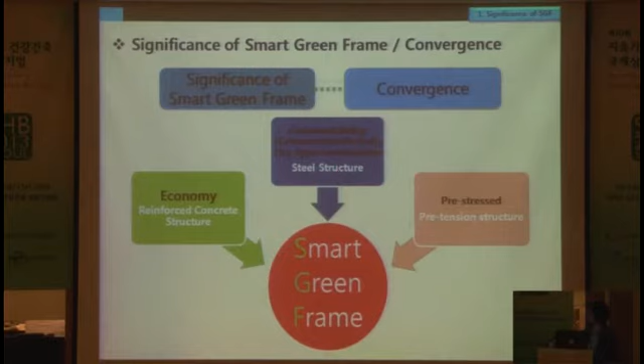Smart green frame was developed to achieve the same degree of economy from concrete structure and constructability from steel structure, with and without pre-stressed technologies.

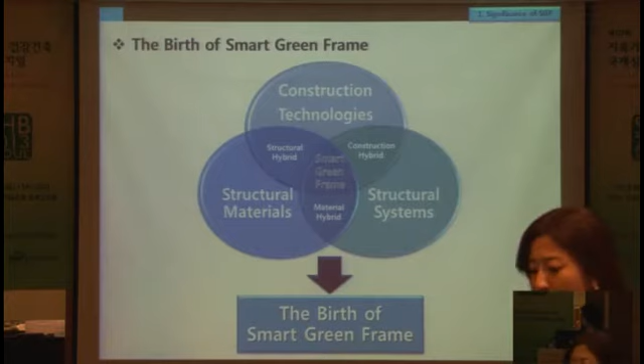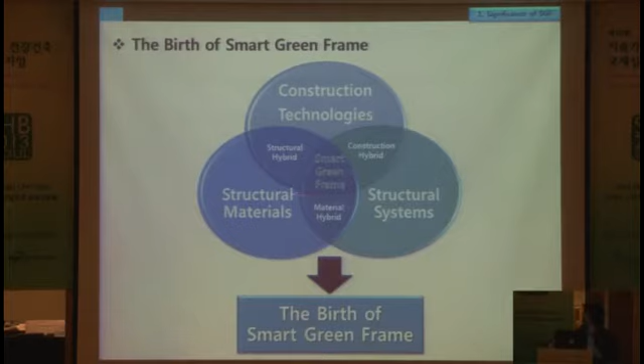These goals can be achieved based on the convergence of three fields: structural materials, structural systems, and construction technologies. As a consequence of these convergences, we have structural hybrid, material hybrid, and construction hybrid. This is what the smart frame is targeting for.

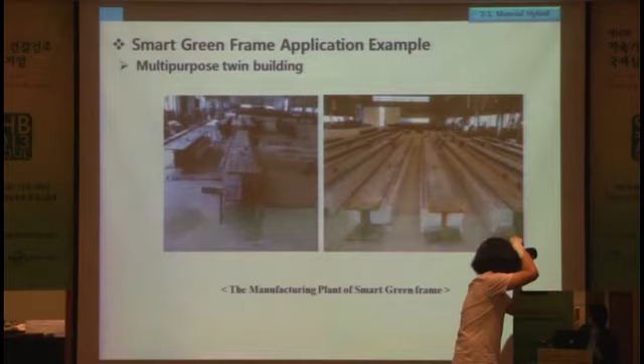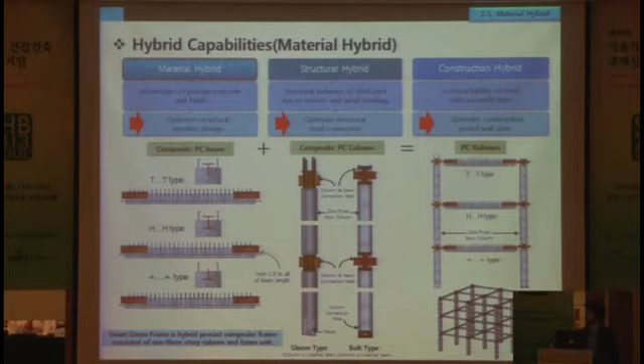The first one, material hybrid, is a consequence of convergence of structural materials and structural systems. In that material hybrid, the precast concrete is encasing a web and the lower part of the flange of steel sections, so that the slab will be installed not on the top of the upper flanges, but on the top of the precast edges. With that capability, we could have reduced beam depths and also additional contributions of concrete to the flexural load bearing capacity.

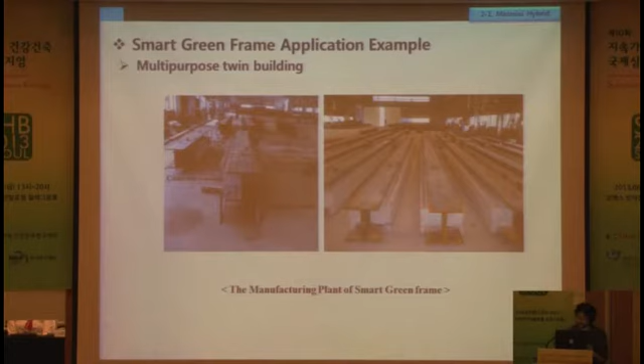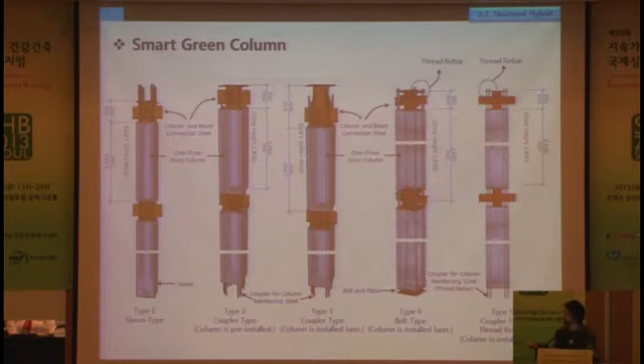Now the second hybrid system is structural hybrid, where instead of a steel beam, we have precast concrete beams, where the steel section is inserted between upper and lower precast concrete. That precast concrete constitutes the major part of structural materials, while the steel structure is a minor part - about 20 to 25 kilogram force per square meter, about 1/10 of reinforcing steel structural quantity. Those small steel sections are connected to the steels located on both edges of the precast columns, and this will serve as connections at joints and will govern the behavior of the total overall lateral behavior.

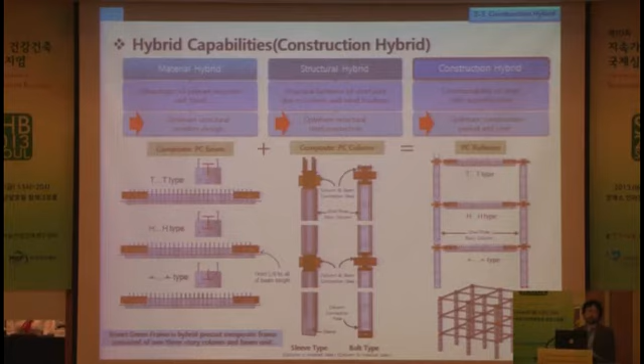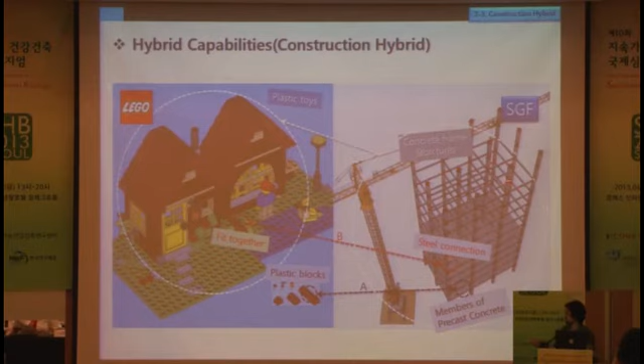These are column-beam units again. Standardized steel connections will be used to assemble precast concrete frames, just like Lego has its own routine way of putting blocks together. No matter how complicated it is outside, it doesn't really matter - we have one way of putting that together, which is very easy. No matter how complicated the outside of the structure is, we have one standardized steel connection method, so everybody can follow the procedures.

This is the schematic view. We have the advantages of steel structures and concrete, which will yield the smart green frame - concrete constitutes the major construction material, with steel erections because of the standardized steel connections.

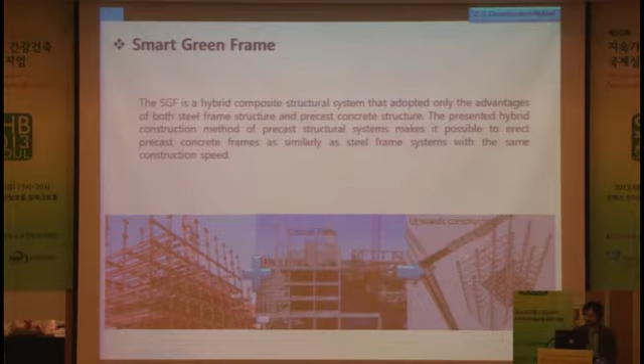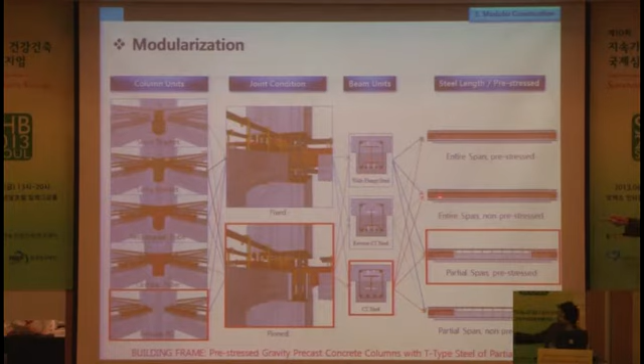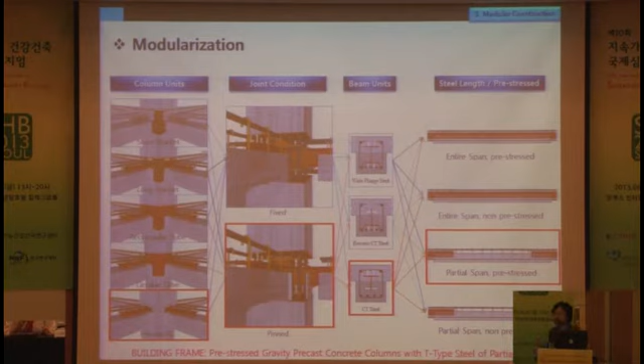This is the modular table. We have five types of column, three types of beams, and two types of joint conditions. We have four types of beam steel, whether they run on partial lengths or through the entire span of the beams. So we have almost 120 types of modular combinations provided to meet the specific needs of engineers and contractors based on construction schedule, construction budgets, external loadings, or whatever.

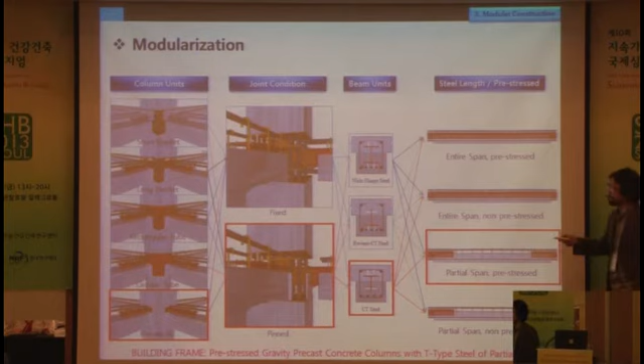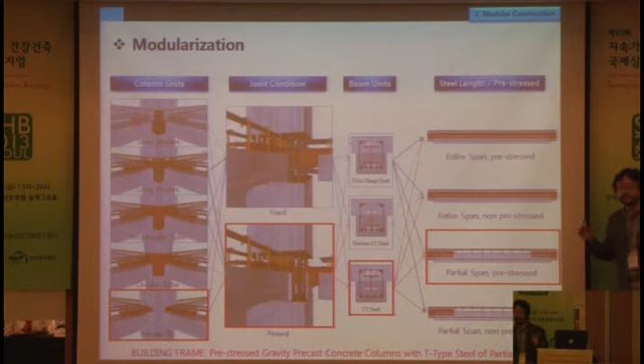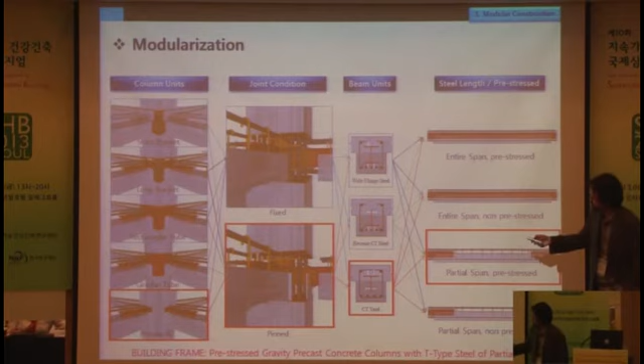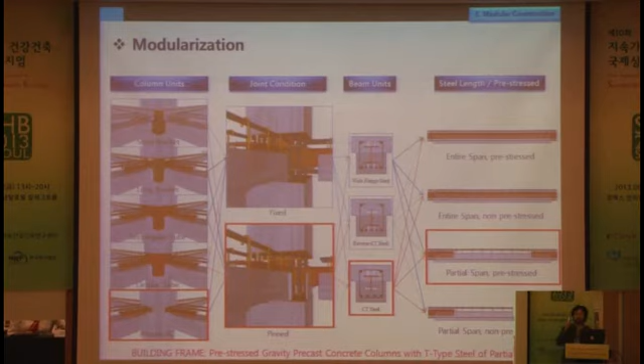But the best module, whatever it is, can really be determined from consideration of design requirements, including building heights, beam span lengths, and building types, to offer the efficient construction method of innovation. Also, the standardized steel connection is a good point - whatever modular combination you choose, you have only one steel connection needed.

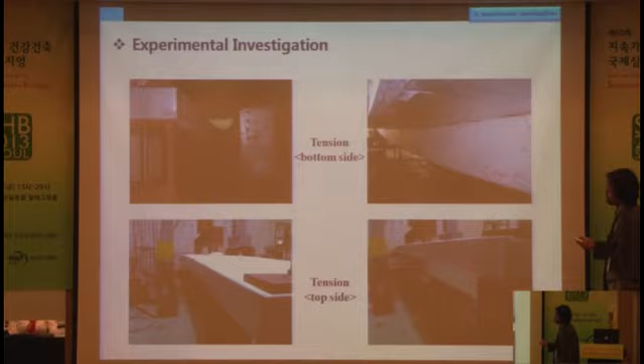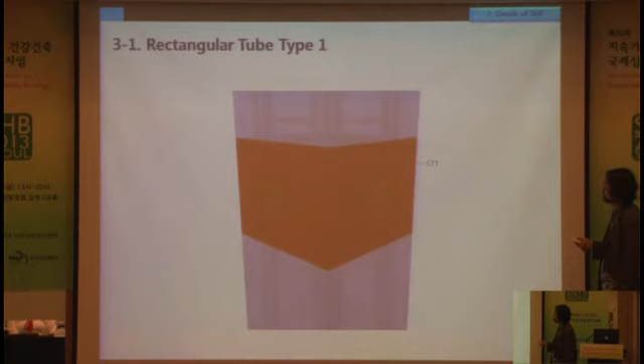I will keep this brief. This is the rectangular tubular type - this tubular type, circular type, circular type - and this is a precast type. The column is all precast except for these shear tabs to be connected to the beams coming into the joints.

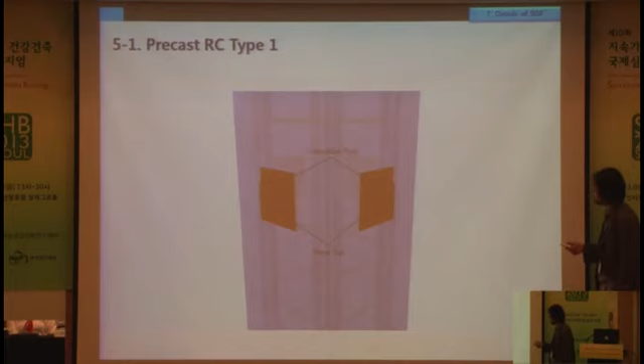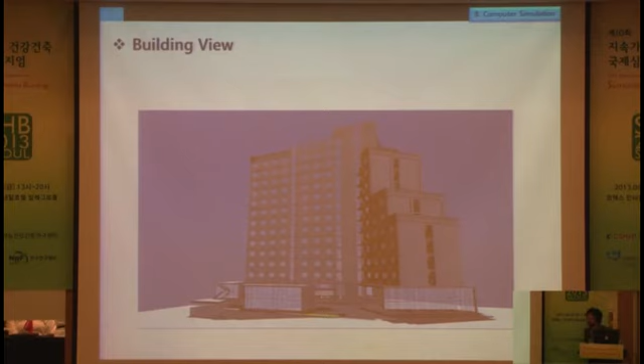We have a computer simulation of the building. We're going to really build this building this fall with the technologies that I introduced. This is a 17-story building in computer modeling, and we have these material properties to use and design the building.

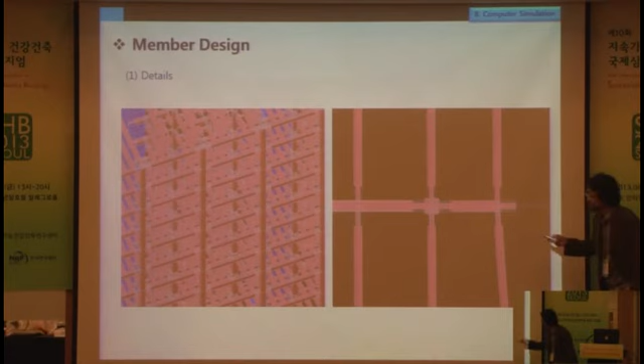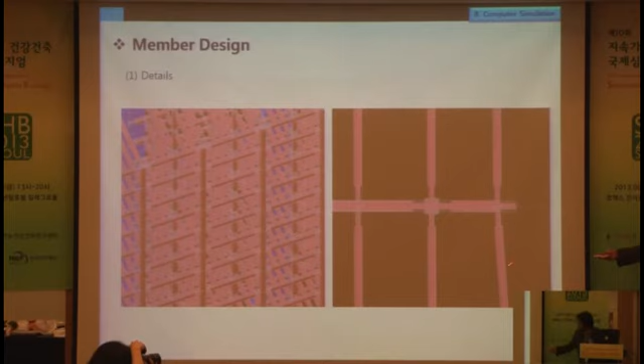This is the joints - see, all the members which constitute the major part of the structure are concrete, which is cheap, except the joints which are steel, a minor part. Don't be scared, because that amount of steel quantity is minor, so you have the advantage of steel connections, and you also have the advantage of economic cost from precast concrete structures.

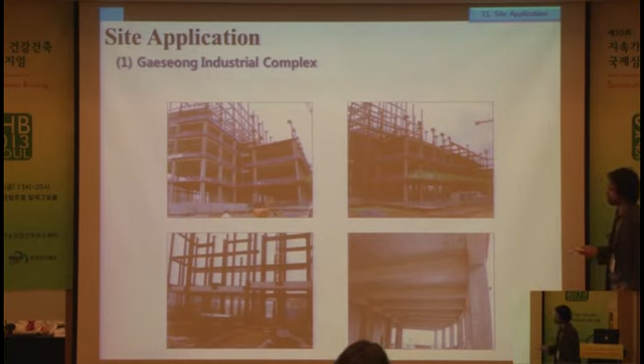This is our previous application - this is Gaeseong, North Korea. We built this building with this technology 7-8 years ago. These are views from Gaeseong before the mountain Songak-san, and even there we constructed all these precast concrete structures.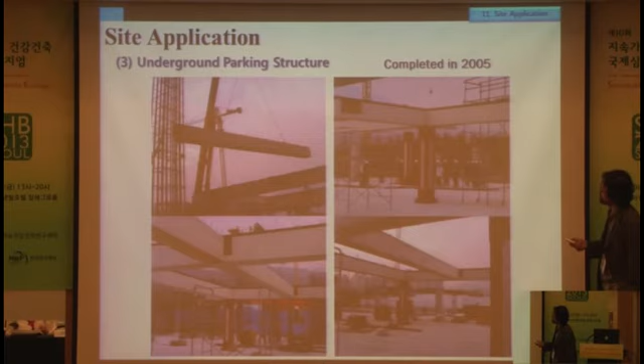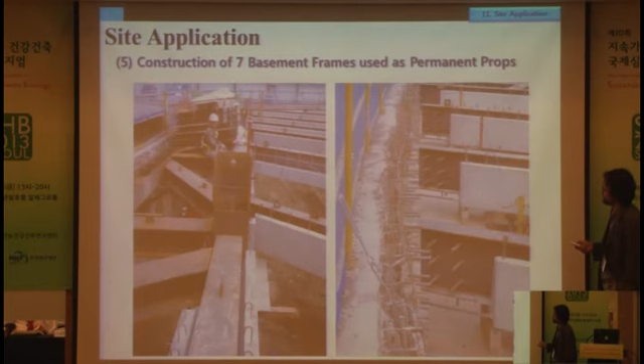There's another one here - this used to be an 18-story building, which became a 19-story building. These are underground parking structures, ongoing, and another construction with 7 basements of frames used as permanent props. This is another paper we produced at the time, and this is a view of what was going on there.

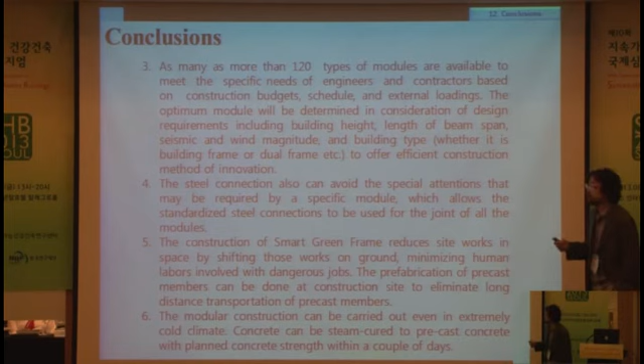In conclusion, this has many advantages, as I explained, in terms of economy, constructability, and assembly time. It also has the steel connection advantage, and it will remove dangerous work in space - everything can be done on the ground level, providing workers with safe environments. It can also be done in extremely cold weather, because we can steam cure the precast concrete structures. Thank you very much.